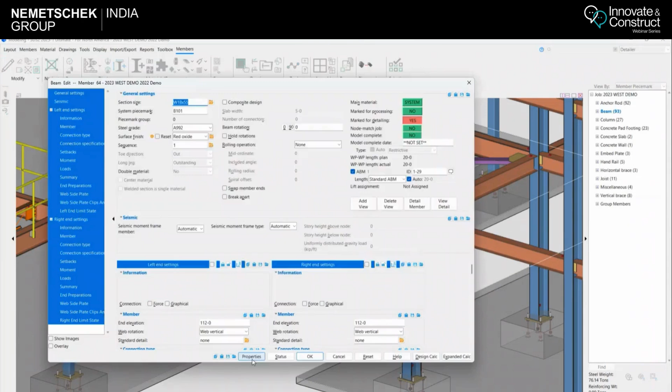So once you activate any property, what will happen? Currently I am not restarting the system, but generally when you edit any screen and you go to the properties, this is where you have your custom properties. So you can have your detailer name, contractor name, architect name. Nowadays a lot of MRP softwares need this information, like PowerFab and Strumis. So all that information you can directly populate into your model, and when you're exporting your PowerFab file, all this data will be fed into your file.

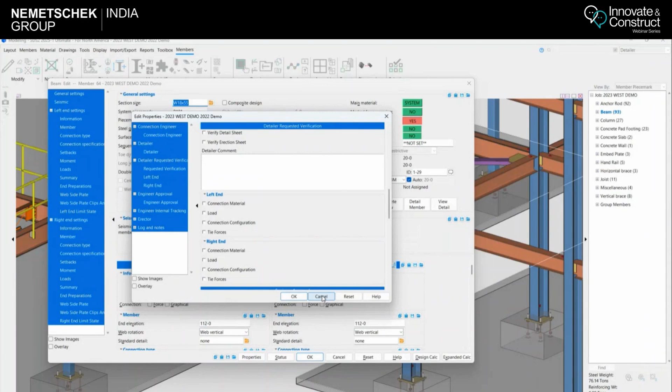And also one more thing, all the contractor information which you're putting here will also be reflected onto your sheet outlines. Then there is one more thing I want to update you. If you go onto your plugin defaults and your command plugins, you have all the toolbox items which you have downloaded from the SDS site. All the setup is here, default setup.

So for example, if you go to PowerFab, you can set the default settings here, like where you want to save your file, what the file name will be, whether you want all the data or the chosen data. You can exclude the zone data. So basically you can ask your fabricator about his requirement and set everything here. So whenever you are sending any file, it will be as per the client standard.

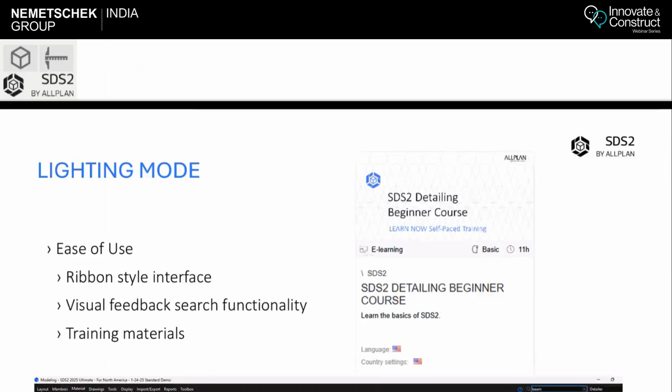And you can do the same with the other options also, like your zoom in export, and the galvanization export options. Okay, so the next thing, I just want to make sure I am on the right. Okay, fine.

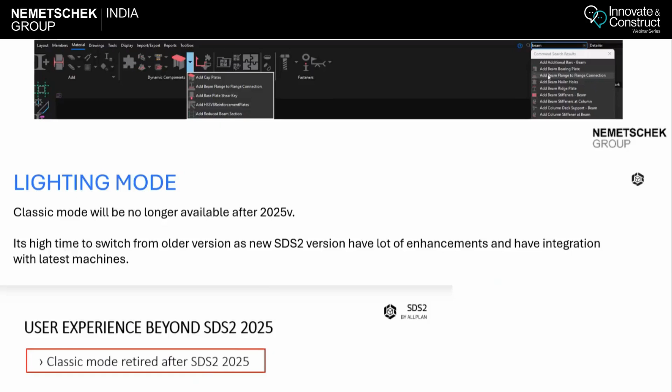So next thing that we are going to cover is the lightning mode. In lightning mode, since the platform has changed, we have introduced a ribbon configuration, and you can also go through the SDS Learn Now portal to learn how to use the lightning mode. One update, SDS Classic mode is going to retire next year. So 2025 is the last version where we are providing the Classic mode.

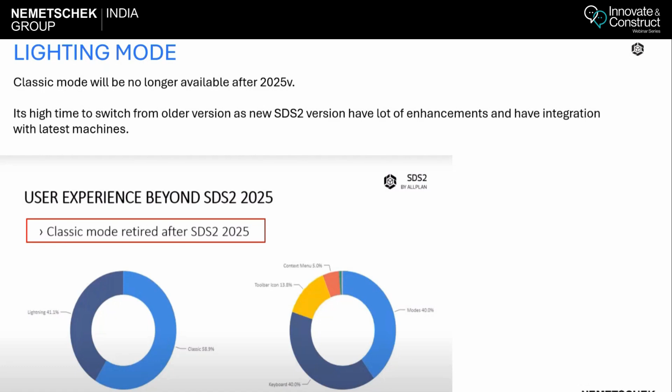The new version is going to release in September 2025. So it's better you start practicing how to use the lightning mode, and at least you will go along. By the time your fabricator asks to work on the latest version, at least you will be handy with the Lightning mode. I will just help you with how to use the lightning mode on a basic functionality. So let's talk about the lightning mode.

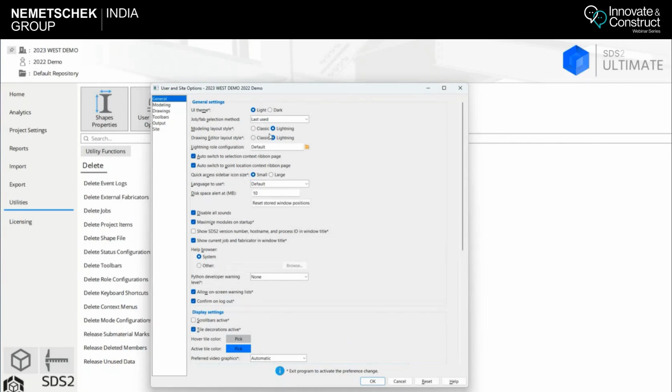Where you can activate it is, you can go to your utilities, user and site options, and in that you will have your option for changing to classic mode or lightning mode. Currently SDS has changed its platform to lightning mode. After 2025, with the 2026 version, we are going to discontinue the classic mode. So if you go on to the lightning mode, I will explain how to use it. Basically all the setups and settings are the same.

The only thing is they have made it more easy. They have segregated everything under these labels. So if you go on to the layout, you will have your selection, erection view option, then save area option. You're making your grid lines, curved grid lines. This is for taking the view, plan view and your side view. Then this is again going back to unchanged view, undo view.

Other than that, you have options for your anchor bolt tools, anchor bolt rod, stair, cage ladder, pour stop, girts, hoppers, chutes, or your purlins. Then you have quick addition tools also, like your stair quick add tool, where you just have to choose the nosing points. Then you have your flat handrail option, and you can directly add a stringer to stair option.

This is all concrete reference material, like your wall, your cast in place column, cast in place beam, your concrete column, and precast single T, double T, hollow cores. Then you can add your footing and concrete grades and slabs. If you miss anything, you can always go here and you have the entire menu for you.

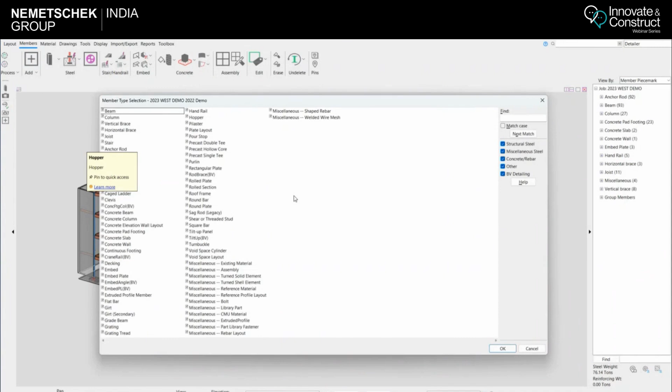So if you try to add any column, you have these options. You do not have to go to the member edit option. You can directly choose here itself. You can add the profile size. Then this is for the connection type. So it's the auto connection, then user defined connection. Then, for example, since I do not have a channel, I'll just add a channel and show you what I'm trying to say.

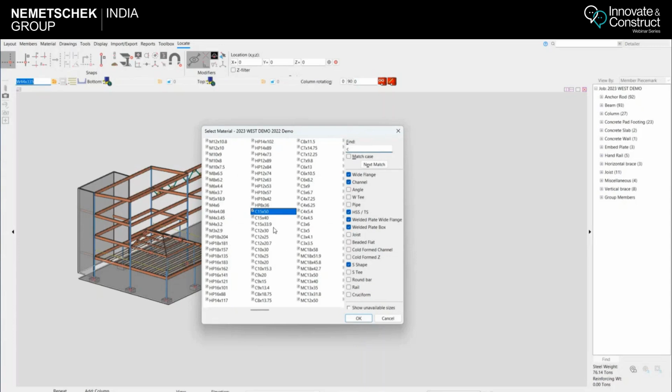So see, I'll just select the C. So now I have the option for back to back material. I have the option for my top and bottom elevation. So top and connection also you can define. Then you can rotate the column.

If you see this one small toggle, if you turn it on, whenever you add a member, it will open the material edit window. And this infinity means you can repeat the member addition. So this is how you can do that.

Then similarly, you have the material option, where you can add a plate, flat bar, bent plate, grating and decking, clevis, turnbuckles. Then you have components also, so you do not have to add them separately. You have direct components for adding safety holes to a column, or safety tabs to a column, nailer holes.

Then in bottom reinforcement also you can add a cap plate and base plate stiffeners. You can add penetration reinforcement to any penetration in main material. You can add column stiffeners, add column stiffeners to beam. Then you have all your concrete options.

Then you have your rebar system option. Through this you can add a cap plate, shear key, or beam flange to flange connection. You can add a pour stop. This is for adding holes, bolts and weld studs. Then this is the drawing option. Since I'm using a complete license, I have all these options available. Else it will only be available in your drafting module.

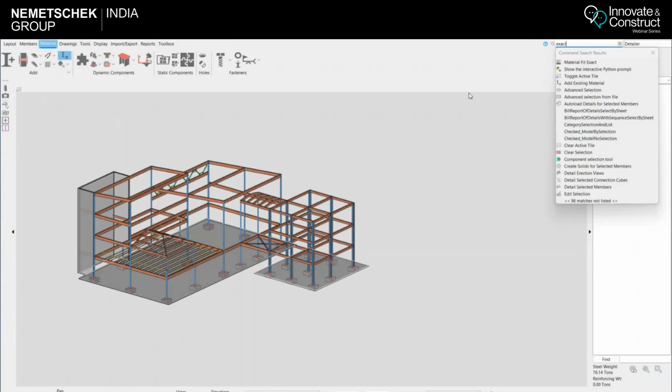So material fit exact. Now, if I choose this, you can see it shows the interactive Python, toggle, or add existing. So it is in the material option. If I go here and choose this again, you can see this box is highlighted. So you can see where the option is.

So the next topic I want to touch base on is toolbox items. I always recommend using toolbox items. If you are on the current subscription, you can always use these toolbox items, and they can streamline your work. There are a lot of toolbox items which might help you to streamline your work.

So if I open the SDS website, what you can do is go to support and go to SDS2 toolbox. You can see there are a lot of toolbox items which are already available. For example, in a lot of places you have issues that AISC and CISC material sizes are not up to date. So you can install this plugin. If you go to read more, I'm just opening it.

You can see in the download option if it is available for the 2024 version. This will have the latest AISC 16th edition and CISC 12th edition. In 2025 it is inbuilt, so you do not have to install that. But if you're using the 24 version, try to install this plugin. Similarly you have other plugins. If you are using any Bentech machine, you can install this plugin. If you are using no paint surfaces, you can install this plugin.

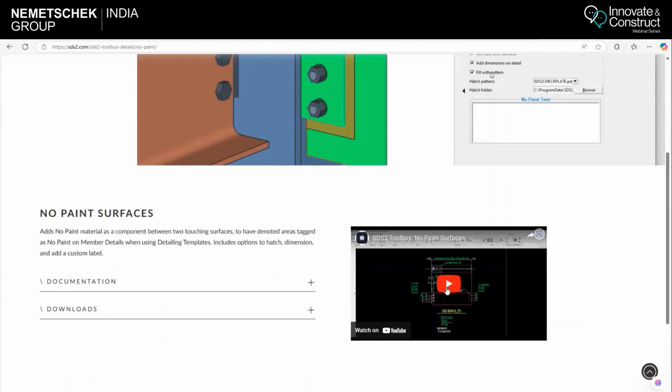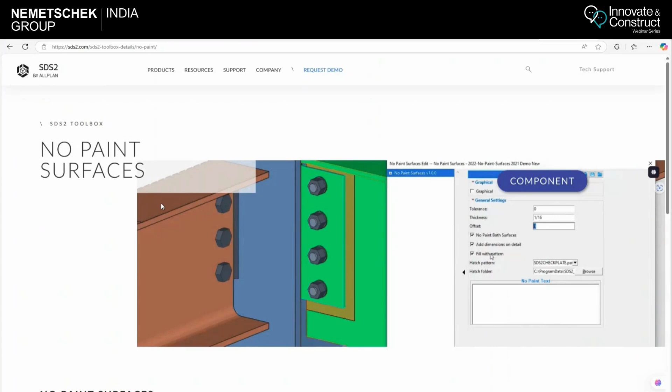How does it work? You have a small video for that. You can also see what versions it is available for, and you have a small documentation. What this tool will do is basically mark a thin dummy layer on your material, and you can mark it as no paint. You can choose which surfaces to include, and when you detail it, it will be marked in your detailing sheets. So there will not be any double work. Your detailer does not have to do it again.

You have a direct component for doing your leveling plates. You can have bearing plates. Then you have your MiTek plates, your EMI piece mark export, your cost estimators, your dimension clearances. If you feed that, dimensions will come automatically. Dimensioning a member, Galva check. This is a good component.

If you import this and install it in your SDS version, it can check the kettle fitness. Then it will automatically provide proper vent holes and drain holes. It can check the kettle crane capacity, ungalvanized materials. All those things you can check using this tool.

If you install any tool, when you go into your SDS software and open your model, if you go to the toolbox option, you can see all those toolbox items are available here. You can check all the nearby members' clearances, your cost estimator, then your BIM upload option. Then there's the galvanization tool. You have your Zeman exports, shrunken connection, PowerFab export. All these tools will be available here, which you can directly use to expedite your work.

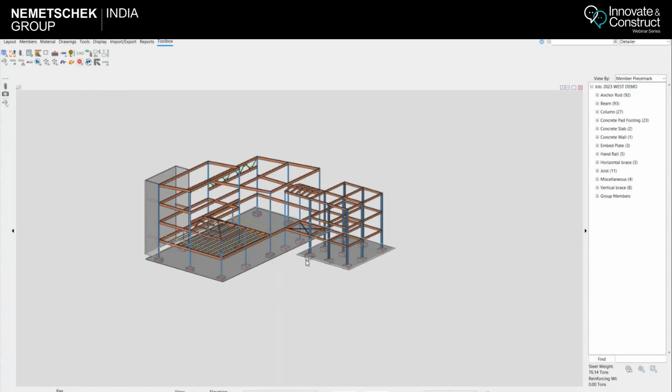One thing I want to update is, there are a lot of people who are complaining that they are not able to use the toolbox items. So a few things you have to consider while using the toolbox. First, if you have a subscription license, there is no issue. You can use the toolbox items. If you have a perpetual license, you should be on the current SSA, software subscription agreement, or AMC. It should be renewed and up to date. Then go to id.sds2.com organization admin.

So what will happen? If you do not have access, you can go to your licensing and go to your organization admin on the site directly. Once you open it, you have your Tendu licensing management portal. If all your licenses are current, there is no issue. But for example, if out of 10 licenses only 4 are on the current version, try to make a separate group. From your group option, create a separate group for your current licenses and non-current licenses.

If you see here, under licensing I have my toolbox. If you click these 3 points, you have your toolbox usage. For example, I have my name here. If a license is allocated to me and it is current, I will reserve this for me. Similarly, you can reserve the current license to a user. In that case, all the non-current licenses will be in a separate group and all the current licenses will be in a separate group.

There is one more good option, the anchor bolt rod tool, which I showed while showing the lightning configuration. You can go here in your material and use this anchor rod tool. For example, if you're adding anchor rods, go to anchor rod tools, and a window will come asking whether you want to add it to member, material, or holes. If you choose member and press OK, then go onto the columns. If I have all these columns identical, I will select these two columns, or I can select multiple columns also.

I press OK, and a window opens where I can define embedment length, projection length, and all. Many times in older versions, there was a catch where somebody entered a wrong projection length and the embedment length was wrong. Here, if I have 1 feet 9 as this value, you can see all the other fields turn red, meaning there is some issue. Until everything matches, these fields will not become correct again. So you cannot mess with your anchor bolt length, embedment length, projection length, or overall length.

Then you have the option for adding a straight, J hook, or stud type of rod. Then what grade, what finish you want, and how many nuts and washers you want on top of the base plate, bottom of the base plate, and in concrete - you can define all of that.

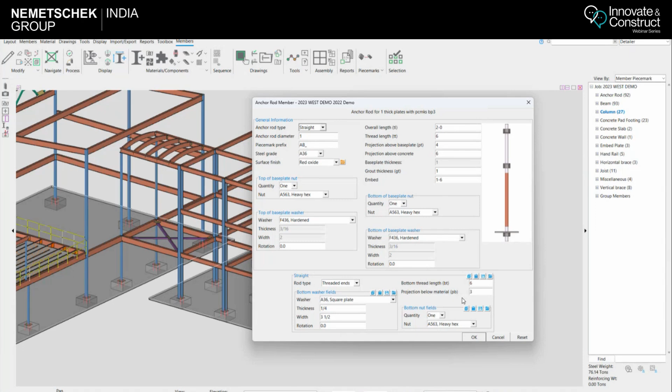Now the advantage of this is you will always have consistent piece marks. Many times people say that because they changed something in the anchor rod, the piece mark was not clubbed, or all four holes ended up with different piece marks. You will not have those kinds of errors through this. And if through the column schedule all these anchor bolts are similar, you can directly club those members and add them through this anchor rod tool.

Also, for embeds, do not try to add them manually, because if you rotate and copy the material, the piece marks get allocated in a different way. So always try to use the embed schedule, where you can define all the properties, whether you want it outside the wall, inside the wall, whether you want a DBA bar, a stud, or just a nailer hole. All those things you can define here.

Now we have an interactive page where you can see the images also. In that case, an identical piece mark will be applied to the entire embeds, and it will not create any issue, and it will expedite your work.

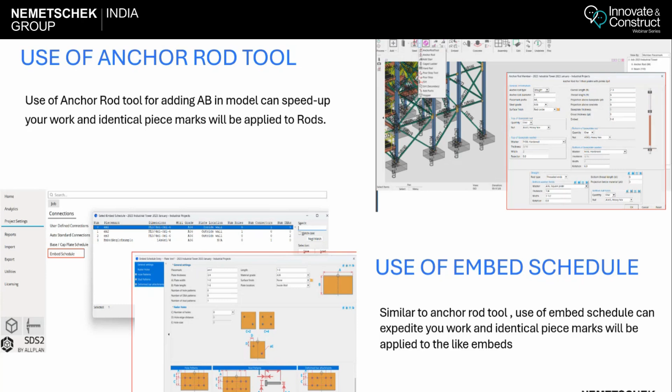Then the next thing I want to update is how SDS can handle complex geometry. Now in SDS's latest lightning mode, you have direct components for adding anchor rods, stairs, ladders, railings, post stops, and hoppers. These components will help you handle miscellaneous steel in a more capable way. So let me show you a video of how easy it is to add a stair in SDS using these components.

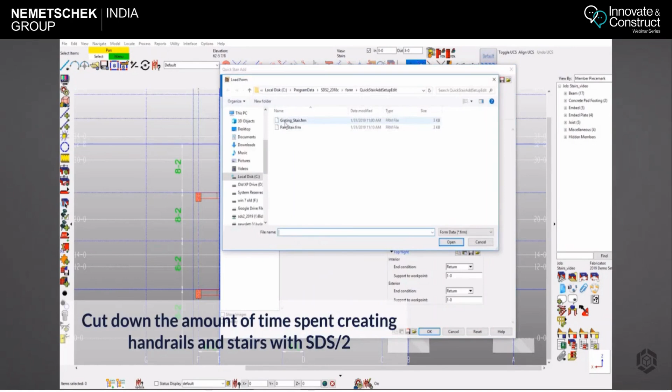So what I did is I imported the drawing into SDS. Then through this Quick Stair Add tool, I'll just choose the nosing points.

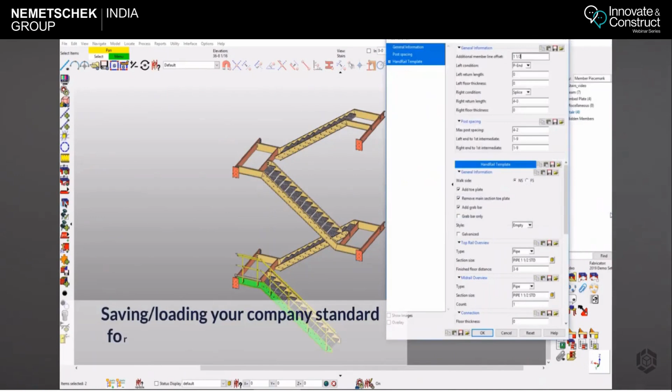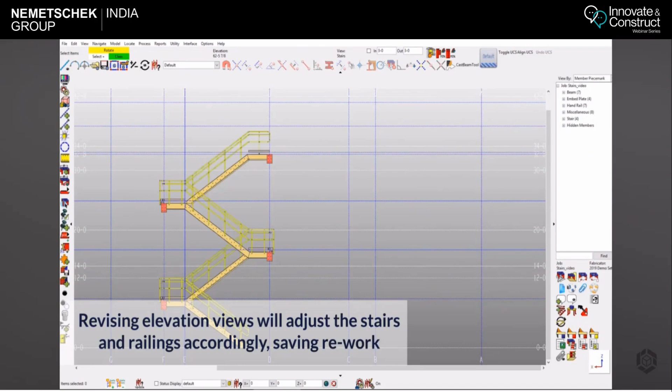And the stair tower will get erected. For adding handrail also, you have a direct component for adding handrail to a stringer. Using that, you can directly add a railing. Later you can adjust - this is just a skeleton. You can adjust the railings and other things, and you can move the entire stair if you want. So this is the most time consuming task as a detailer, and SDS using the component makes it very easy.

I'll just show you. So if you see handrail, add to stringer, and later you can also adjust the railing and the post, splice connections, and other things.

Going back to my slide. So we'll go on to the model revision. A lot of people are not using the model revision tool. Model revision is a separate thing.

So more data for tracking will be available. Model revisions and drawing revisions are basically different. It's a quick, easy way to track and store the revision data inside your model. This will permit you to generate a list at a later stage, which you can provide to your fabricator, and you can color the model. You can create a validation list, and you will not miss anything while submitting the model.

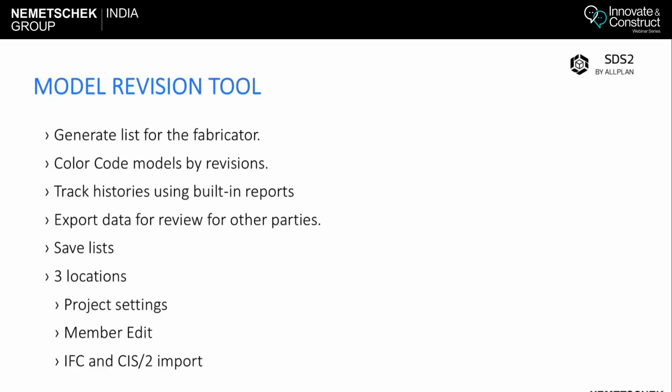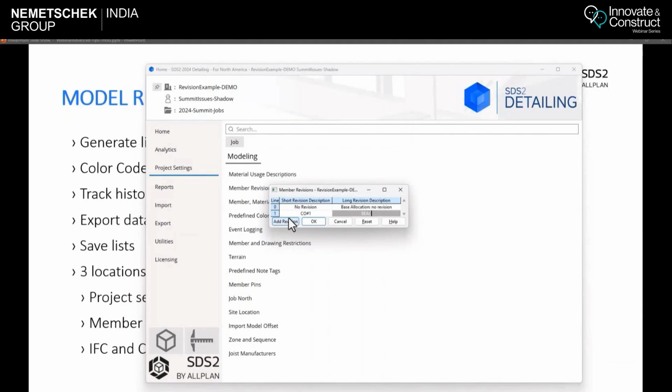So I'll just show you what we can do. There are some locations where you can go and add a revision. The first is you can go to project settings, modeling, member revisions. The first thing - do not mess with this zero. Make a new line and add your change orders here. Add revision, CO#1, and the reason is because... let's save this.

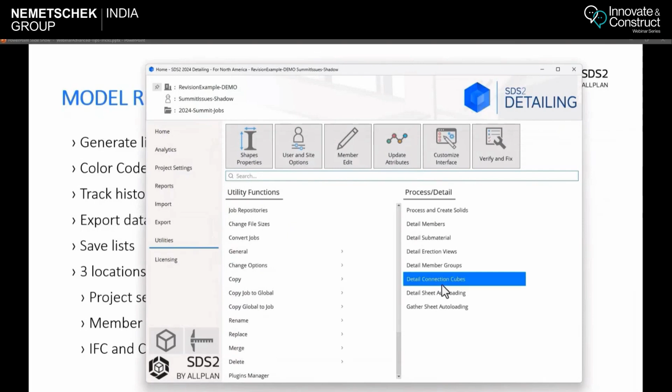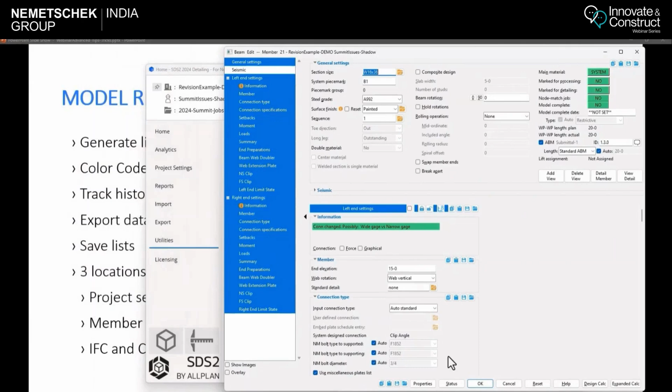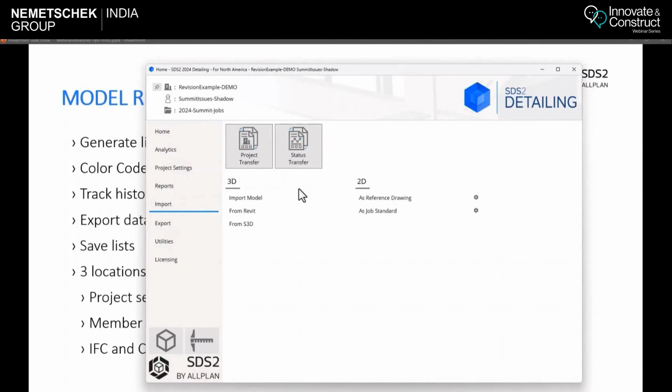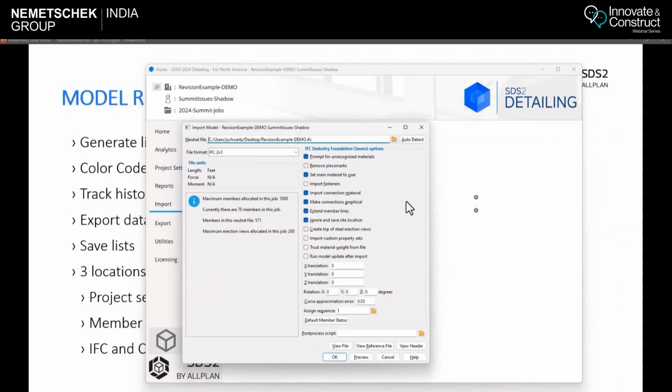Now where's the next location? I can go to member edit, and I can go to any member, and if you go to the status, you can change it from here also - the one I put in, or you can add a new revision. The next location is if you go into imports, and if you export or import the IFC4, IFC2, or CIS/2 - go to reference drawings, and when you import a model, you have an option, default member status, where you can put a revision. Let's close this.

Now go to the model. You can also put revision in the model directly. Let's go on to snap, on the plan view. Let's turn the depth check off. Now I select it - one thing I want to do. I'll just save this selection.

I don't know how many people are using this. So what you can do, you can select the member, put this, and save this by area. Now let's go on to the tool and update attributes. You can select the revision which you want to update, and by area. So you can select the area. You can also go by piece mark.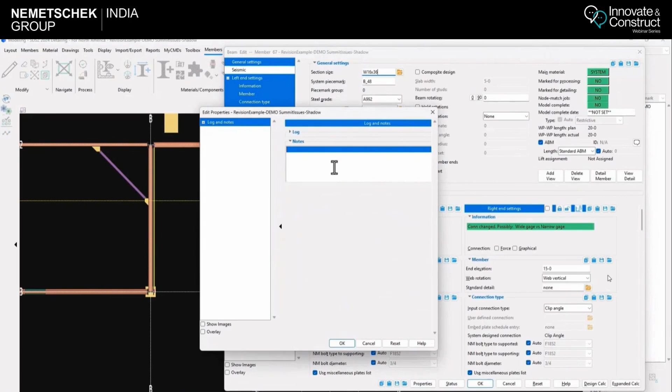One thing I want to tell you - whenever there is any revision, you can always select the member and add a note to that member about what exactly is going on. So section size is changed, or whatever exactly happened. You have to grab all the members and isolate what are the changes in those members, then send that list to the fabricator, and he can exactly tell you what is going on - whether the member is in the shop or in the field. So that will also affect how you're going to handle your revisions.

So now we were talking about the reports. What I will do is go above and go on to the reports, and I'll go by member and member revisions. Again, member and member revisions.

I can select the revision and I'll get a nice list of all the members which are modified by that particular list. Now I can also go by revision by member. In that condition, I can just select, load the list, and when I open it, if I press OK, I get a list along with the reasons - what all members are affected and why those members are affected.

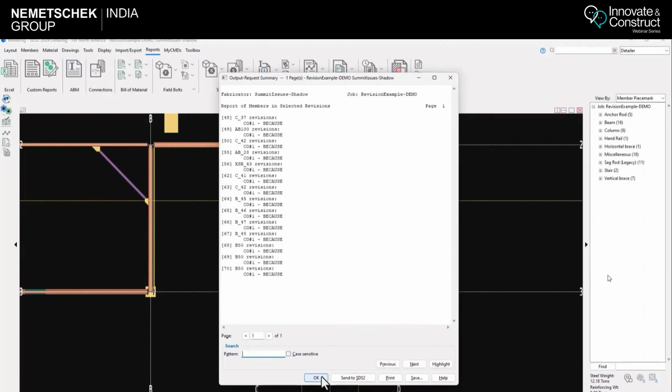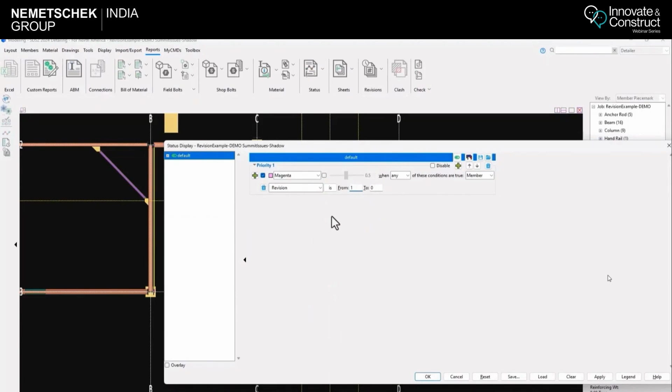So now next is what else you can do - let's run a status display. I'm going to open and put a magenta and put some revision. This is my change order 1, hit OK. You can see the color code of all the members which are affected.

Now, some people know about this, but many people do not know about this. So it's just for your reference.

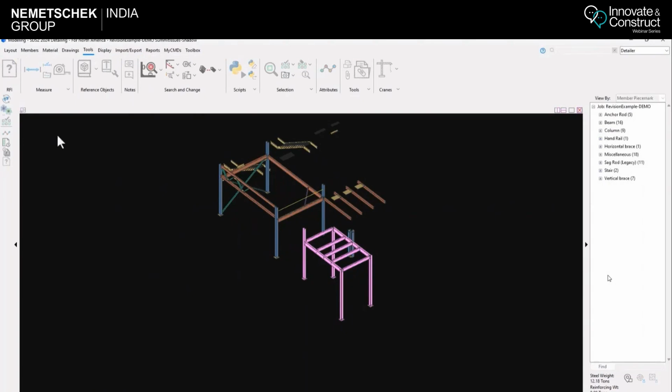So now what you can do is go into your tools and send a 3D RFI of this. If there are fabricators who do not use SDS2, you can always send them a 3D RFI. I'll just keep it on desktop.

So let me save this. Okay, one thing, if you press yes here, it will directly open into Adobe. It's just a problem, we are going to fix it in an upcoming version. So I'll say no, and I will directly open from my desktop. I'll just open this and it will open in Bluebeam.

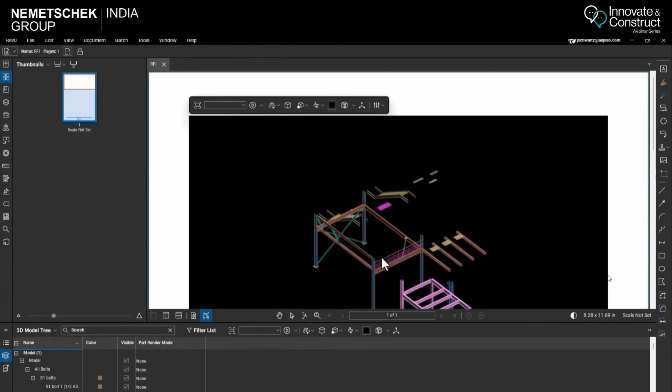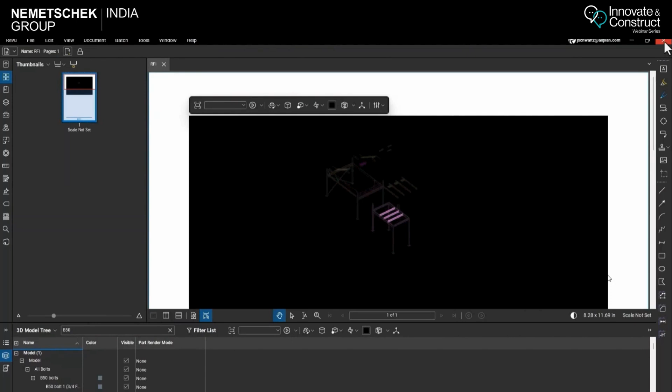So now you have your 3D model and you can see all the color codes are there, which your customer can see. There is one more thing: if you go into the 3D and search for any piece mark, say B50, you can see how it has isolated the members, and you can use this PDF for now for review purposes as well.

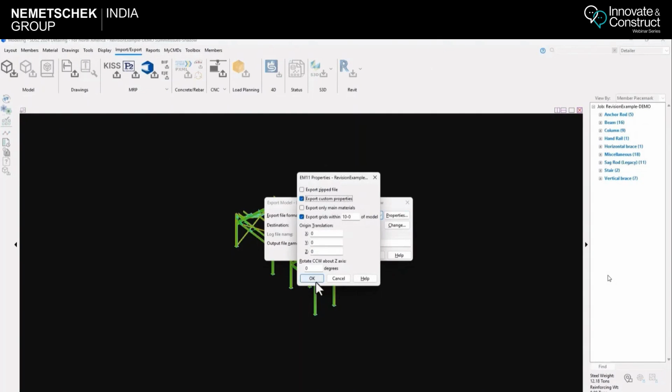Next, I'm closing this and going back to the model. You can also take out an IFC file which contains the embedded data, if you have any EM11 or IFC file. So if I export EM11 and export it along with the custom properties, I'll just keep it on desktop, save this, and then you can send it to any IFC file reader.

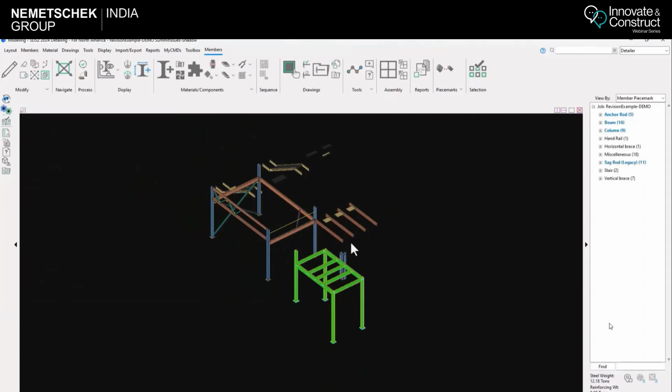Now one more thing: if you have to select any member, add to the current selection, or remove anything, it's very easy. Whatever member you want to select, just select that member, go to that list, select it, and save this. This is how easy it is to save a member.

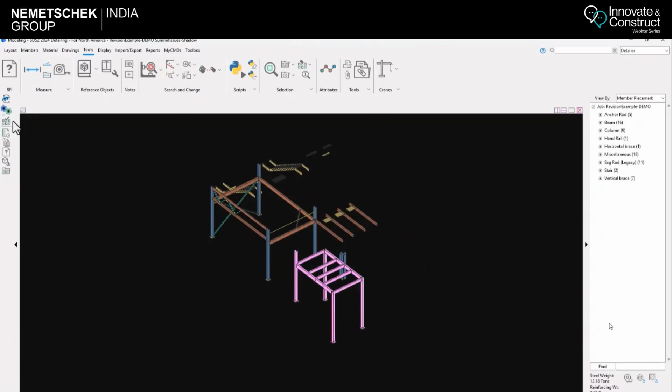Similarly, if you want to remove from any selection, you just unselect that member, again go to that selection list, save it, and the member is removed. So it is a pretty handy tool to do this task.

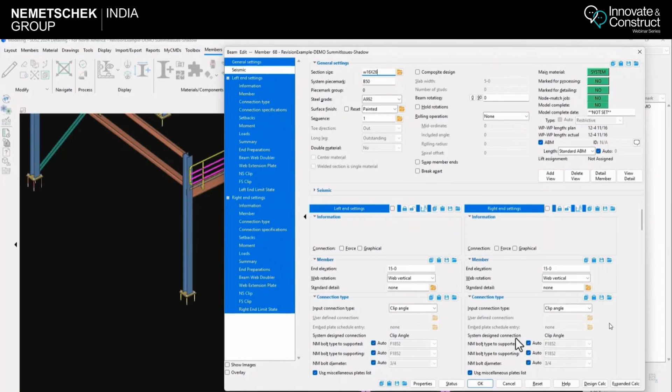One more thing: if I select this member and change it, for example, I go here and change this member to W14 by 22, W16 by 26. Now, you can pretty much remember everything, what all members were there, and it's a damn solid system.

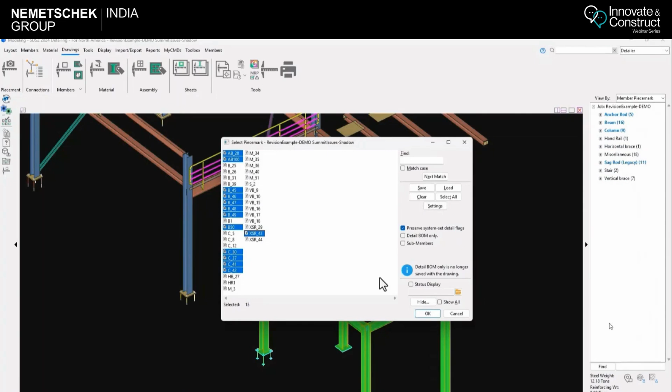But there are a few things you have to watch: if you delete any member or relocate a member, you have to keep a watch on that. There's one more good thing: in SDS, when you go to detailing, SDS knows what all members are added or deleted. You can load your list and you have all the members that need to be detailed.

There is one more thing I want to show you. If I go to my list and select the members, you can also detail the selected members. This is a pretty good option where you can directly in SDS select the members and detail them.

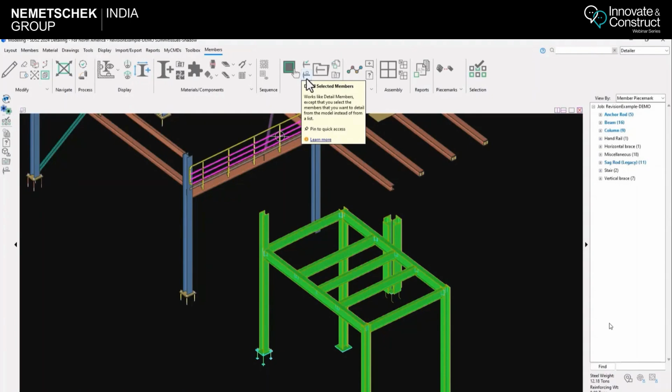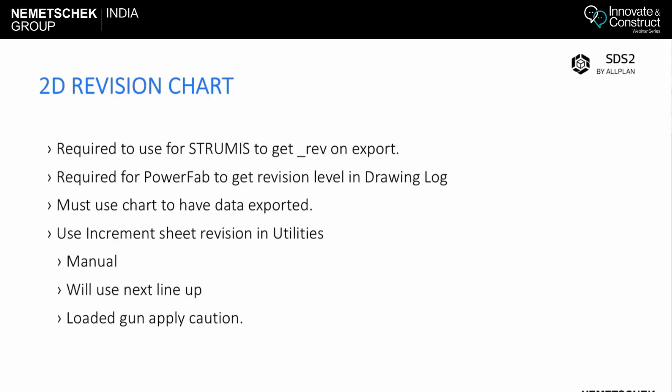The last topic for today's webinar is the revision chart. A lot of people are still using the manual option for feeding the revision chart of any job. So I'll give you some tips and tricks on how to do it through the system and how it will help you. Let's talk about the revision chart.

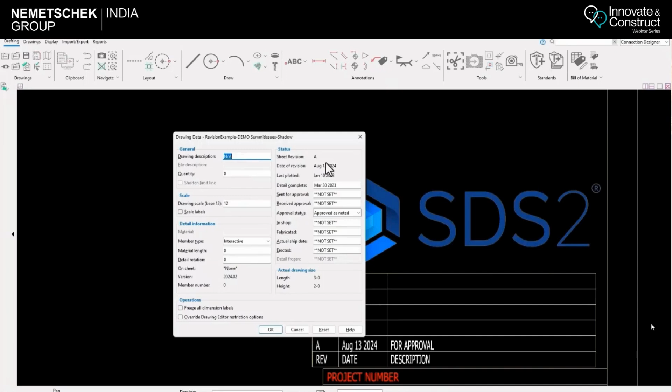A lot of fabricators or clients are still using this and just putting text here. If you put any text here, it is actually not getting added into the sheet. If you want to add it into the drawing, you have to use the sheet revision editor. When you put the data here, it gets embedded into the sheet, and it can be used later into any MRP export, like PowerFab or STRUMIS.

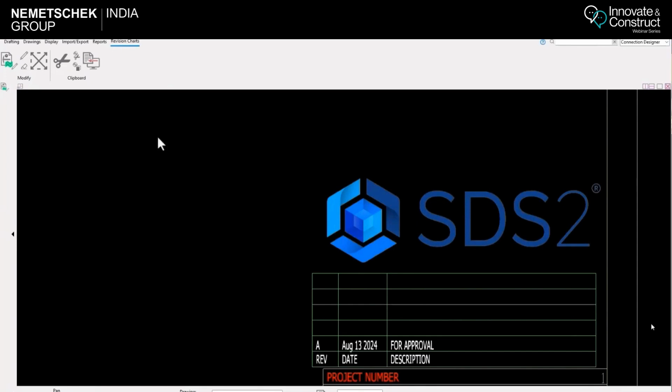Now let's go out of the sheet, because I don't want to log this up. So now there is a concern: many people will ask, suppose I have 200 sheets, do I have to go to every sheet and edit this? It is going to take a lot of time.

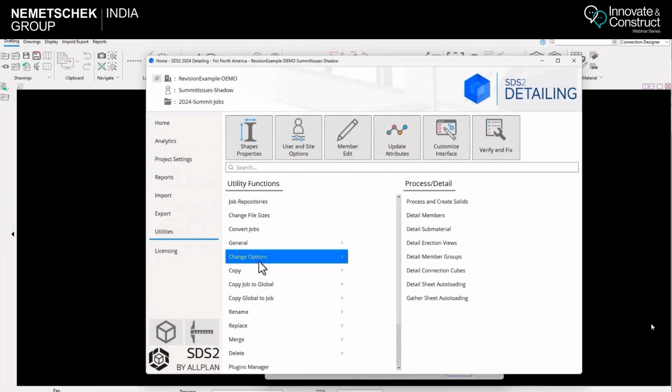So there is a shortcut. You can go into your utilities and change option, and increment sheet revision.

Okay, sheet revision. One thing I want to notify: there might be different sheets which might have different sheet revisions. So whenever you're doing it, be very careful, or have a report of what sheet is on what revision. You have to keep the data, else you cannot undo any of this, and you have to go manually and edit all the sheets. If you mess up on 200 sheets, it will be manual work.

So there is one report which I want to show you. It's an old report. You can go to your reports, go to systems, status report by sheet. If you go here, choose the revision level, select the sheets and hit OK, this will pop out a nice clean report where all the sheet revision data will be there.

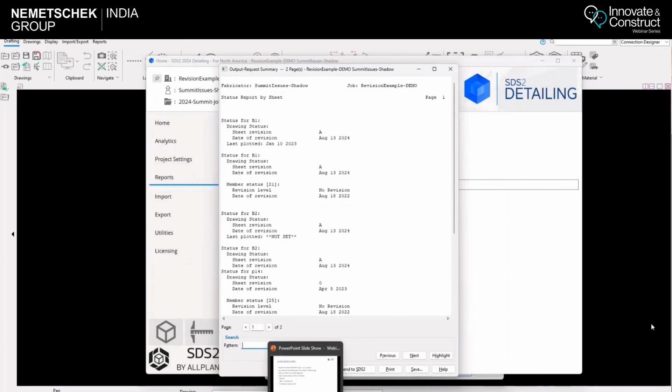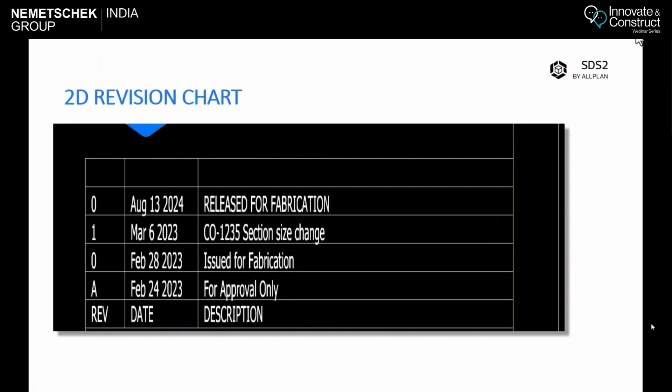So it will basically tell you what is the sheet, what is the revision level, and what is the status of the sheet. It will give you a brief idea about what the sheet status exactly is. So you don't end up with something like this, where your revision is 0, then 1, and again a new 0. At least you have an idea of the sheet revision, and you can update the sheet accordingly.

So again, I'll go into my utilities and my increment sheet revision. Now I'll select the sheets. There are three methods. I can choose it numerically, so if it is a 0 revision, it will increase to revision 1. The second is alphabetic, where the revision will go from A to B. And the third is manual, where you can enter what the sheet revision is.

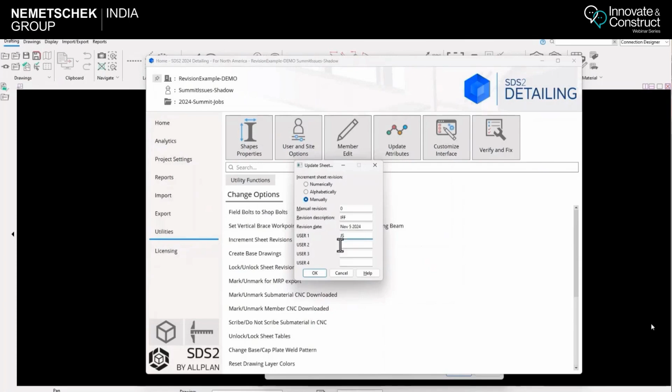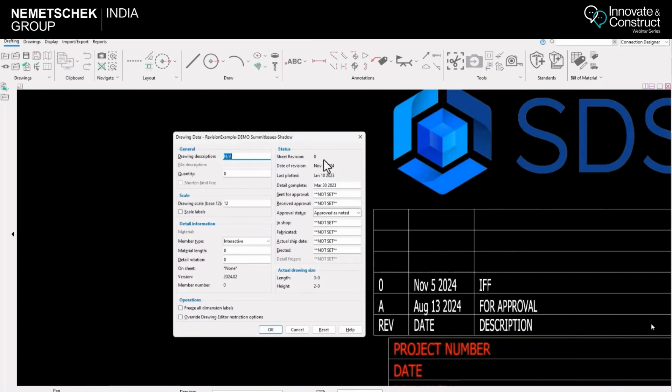Then what is the description? So it's IFF, and who has done this sheet or who has checked it, so this initial. As I press OK, you can see all the sheets are revised. The system has increased all the sheet revisions to 0. If I come back and open the detail, you can see the sheet is now revised, and it has also embedded all the drawing data.

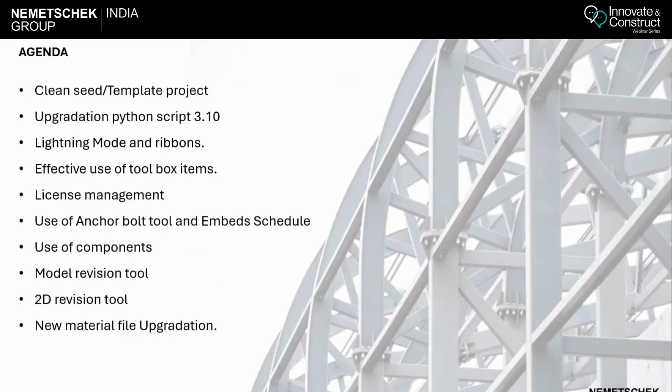Okay, sorry. Again cast my screen. Sorry. Okay. So just go down. Sorry.

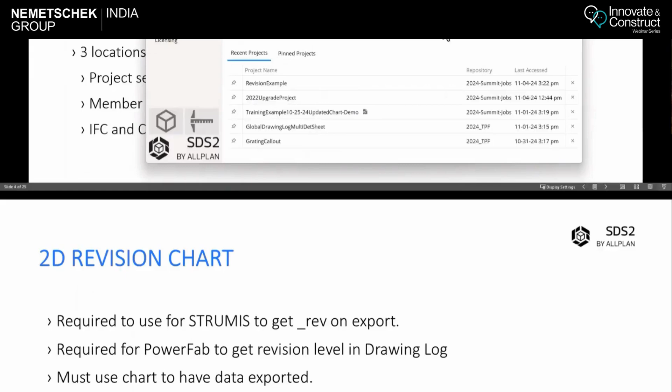So the last topic we have, since revision we have covered, is new material files. In my PPT I already told you: if you have any issue regarding your material file, go to toolbox item, update shapes and profile. There were earlier releases with an issue with duplicate material. So always install this plugin, so you have all the profile sizes as per the latest AISC 16th and CISC 12th edition.

Are there any questions? Shweta? Yeah, hi Mohit. I think there is one question in the chat. Can you hear me? Yeah, I can hear you. Not audible? Okay, sorry.

If I update the sheet revision using the change option and later realize that I entered the wrong date or need to modify the submission date, how can I update it? I already told you in my PPT. Whenever you're using this change option, be very careful, because once the sheet revision is updated, if you have to edit anything, that will be manual.

Want to know how we can copy our keyboard configuration from 2023 to 2025. Okay, I'll just show you. You can go to your utilities, go to custom interface. Once this box opens, go to modeling settings. Here you have your keyboard configuration option.

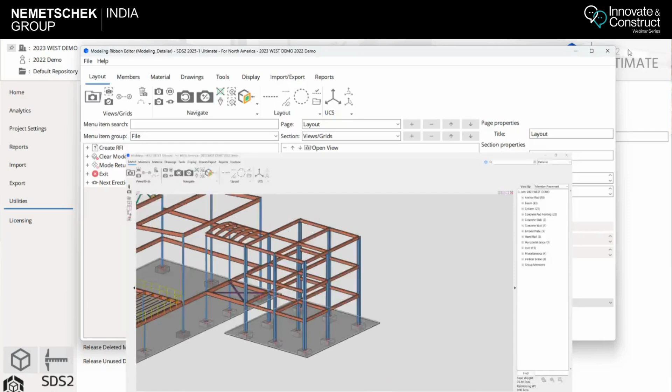And this is the page where you can choose. You can choose grid, navigate. These are the options and whatever commands you want. The layout option is the same option you have in your modeling command. So all these categories, if you want to add anything else, you can choose it here, and how you want to move it, everything you can do.

In layout you can also choose the number of rows and spans. It's a hit and try thing. So you can choose that and change your interface.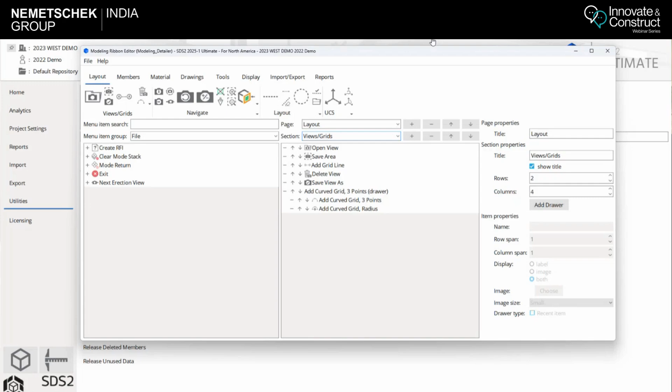Hi, Mohit. In 2025, how to open the modeling license directly? Okay, I'll just show you. In 2025, they have made a few changes regarding licensing. If you go to licensing, you can go to change edition. I think I have something open here.

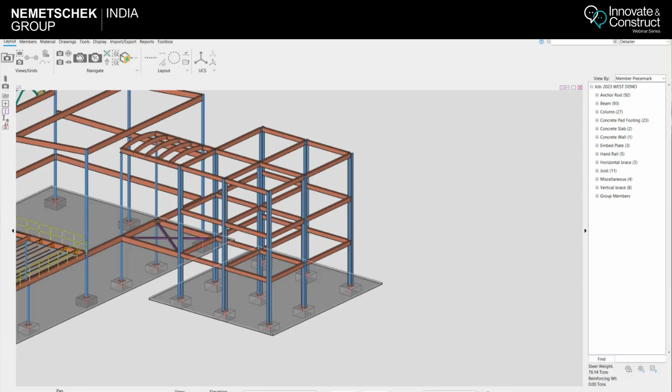I think some setting is open. All the SDS2 machines should be closed before changing the edition. So I have to close my modeling license first and close this. If you go to change edition, I think there is some issue.

No problem. If you face these kinds of issues, here is a small trick. Go to your C drive, go to Users, your name, then AppData, Local, and then Design Data, and just delete all the log files. When you open your SDS license, you have to close it, open it again, and all the old data will go and it will ask again for the file name and all.

Meanwhile, I'll just open one configuration, maybe it will help you. So in SDS 2025, you can go to licensing, change edition. If you select change edition, you will see all the licenses your company has, whether ultimate, modeling, or drafting. Then you can choose your modeling license and it will start working.

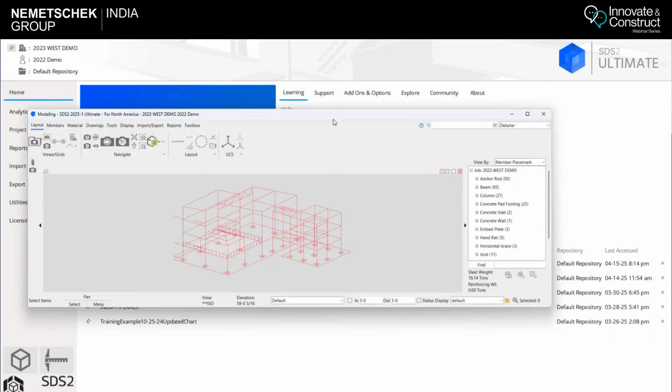So if you go into your modeling... Is there a way to open the modeling and drafting license directly? No, there is no direct way of opening it. So if you are using a modeling and drafting license on one system, it's better to use an ultimate or a complete license. Or you have to close one and then open the other again. This is the catch in the new licensing system. Okay, what were we asking?

Okay, search and replace. I think it is there. I am not sure how to do the search and replace thing. I think it may be in the editor. I'll just check and I'll get back to you on this.

Can you please show a demo for the welding options added in the newer version? Okay, so with the welding option, what they have done is if you export any IFC file... just give me a moment. So if I go into my properties and export an IFC file, a few more things are added. Now you have your zones and sequences in welding also. Now it is capable of carrying all the weld related information into your IFC file. Previously EM11 was the option, but now you have this option also.

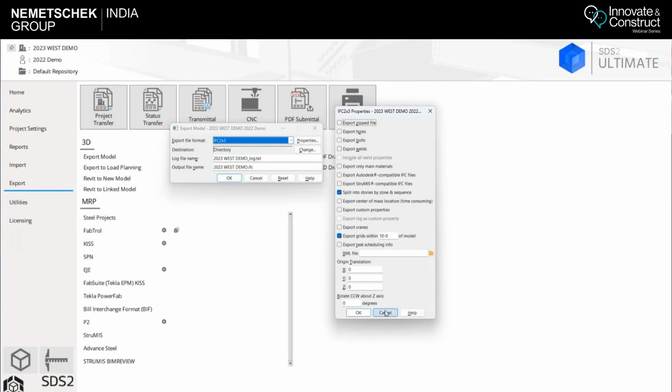There is one more option. If you go into your PowerFab settings, here also you have an option for exporting. So here, for the IFC file, you have options for exporting the grid lines, concrete joists and others. So I'll select all members. All members is basically all the members in the project. So you can export the concrete joist and grid options also.

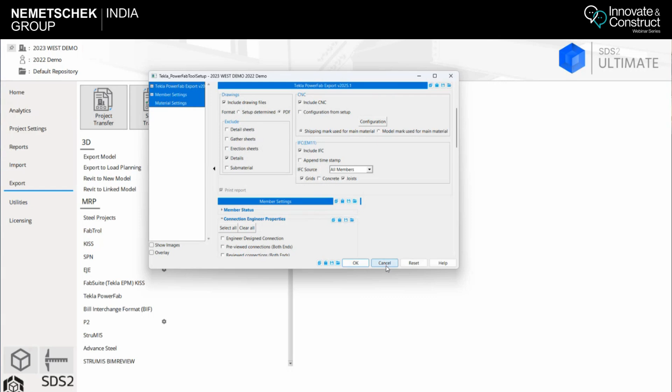So when the customer opens the weld settings, he's able to see it in his PowerFab. I currently do not have PowerFab software here, but when you open it, the welding tab will get populated with the weld information. I will have a separate video for that. I might be conducting a webinar on this soon, so I will give a more detailed description at that time.

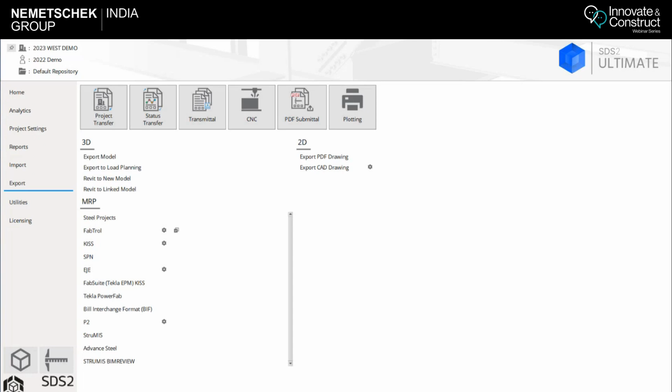Shweta? Any more questions? How to get offline help in SDS2? Offline help. See, in SDS2 you have an option to borrow a license, where you can use an offline license. Okay, one small image is there: you need either an internet connection or you need to install offline help for this version. Okay, so for offline help you can go to your project settings and download the help option. So if you go here, you have your help option.

I think... yeah, sure, I will share the welding related information. Offline help is when you need either an internet connection to reach tech support or you need to install the offline help in this version of SDS2. Just give me a moment, I'll check whether we have that option here. Offline help, I have generally used the online option only, I have never tried it offline.

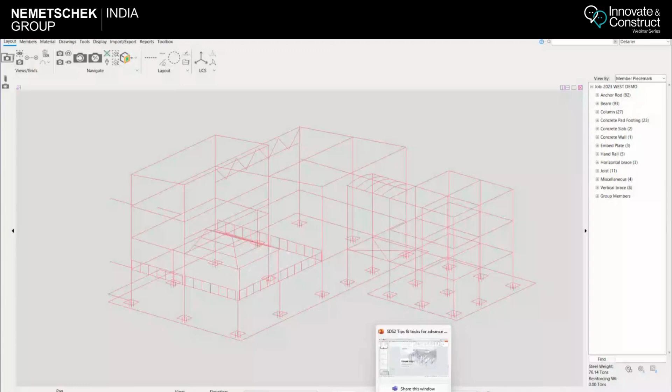I'll share my screen. Sorry, I forgot. So if I go onto my license, in my home I have my option for the help window. So I can always go here, and all the project related settings are here. So you can either save this, or... wait, I'll check. I might have it on my system. If it is there, I'll paste it here itself. Just give me a moment.

Yeah, so I have an offline help window, which is here. I've saved it. If you want, I can paste it into our chat. Just give me a moment. Okay, I cannot paste it here. No issues, just write down your email ID and I will send it to you, or you can also save it as a PDF.